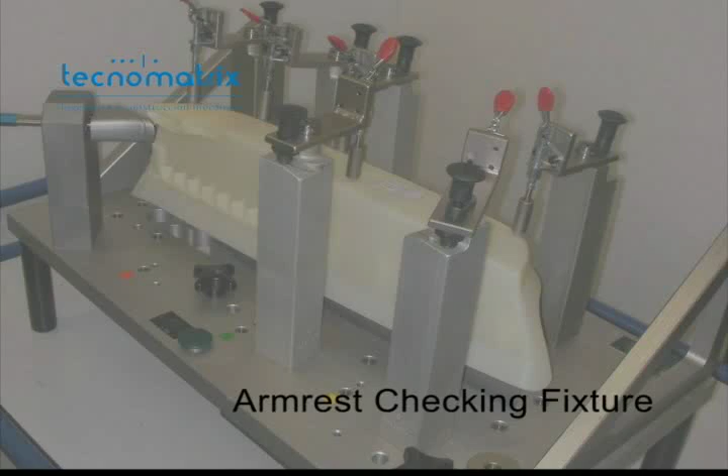Today we'll see together a gauge for an armrest. The main difficulty in this type of part is the number of clips it has. To fasten the part, we have simulated its fixation on the door.

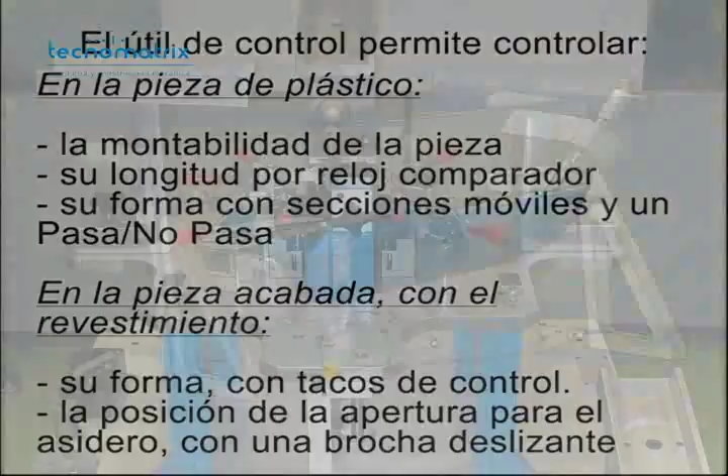This gauge checks the plastic part after the injection process, as well as the finished part covered with foam and the car interior lining. On the plastic part, we check its mountability, length and shape. This is to ensure that this basic part is correct before dressing it with the final interior lining.

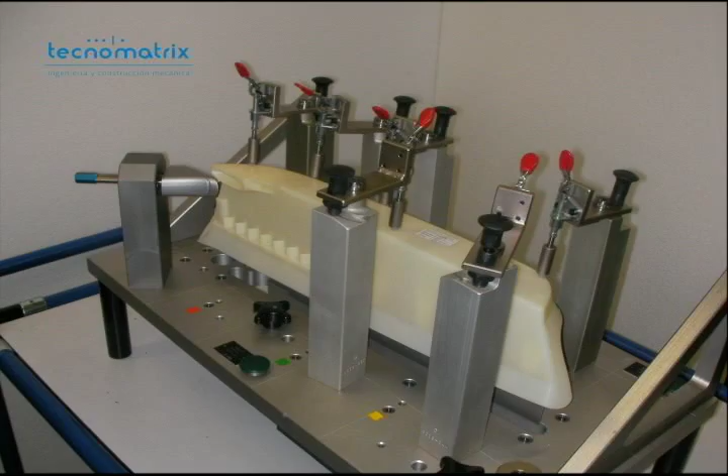On the finished part, we check its shape and simulate the position of the grab handle. This is to make sure that the finished part will fit on the door assembly. Each RPS point enables to fasten one of the clips.

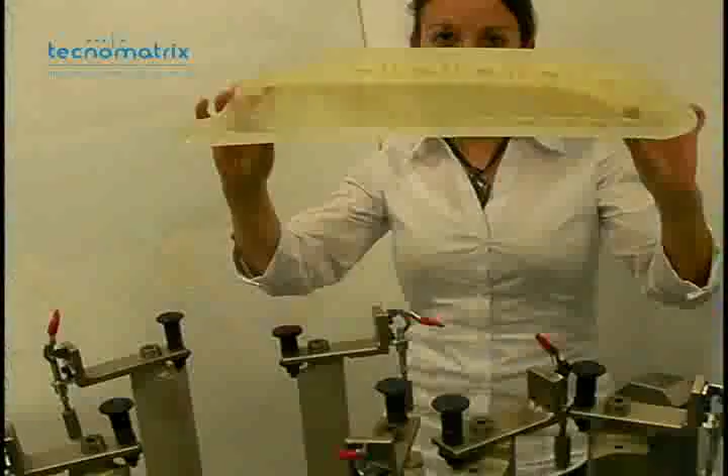To make the mounting of the part easier, we have adapted the clamps on rotating systems so that you can turn back the clamps in a simple and quick way. To mount the part, fasten first the main RPSs. Then, use the squares to turn the gauge back and check that all the clips have entered correctly.

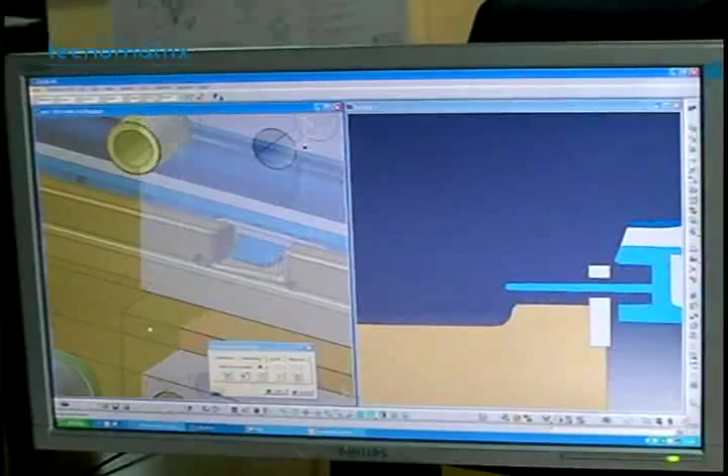Here is a section showing you how the clips of the part are fastened on the gauge. You can see clearly how the part clips on the RPSs.

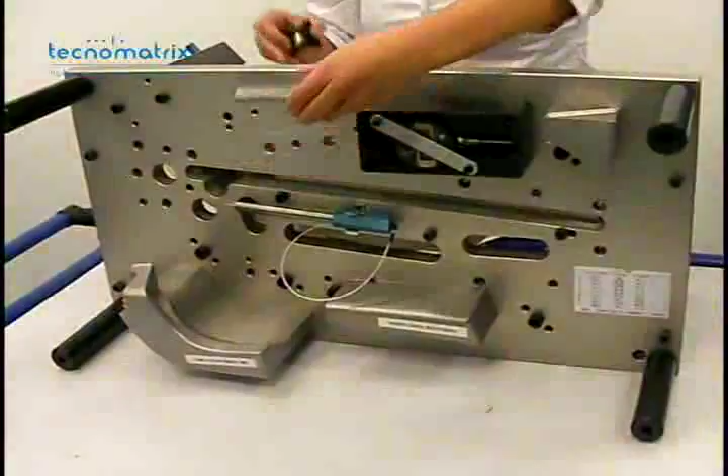The lower side of the base plate is used to store the removable elements of the gauge, such as the checking blocks for the final part, the pin checking the position of the holes of the part, and the dial indicator. As you can see, the blocks are simply screwed on the base plate.

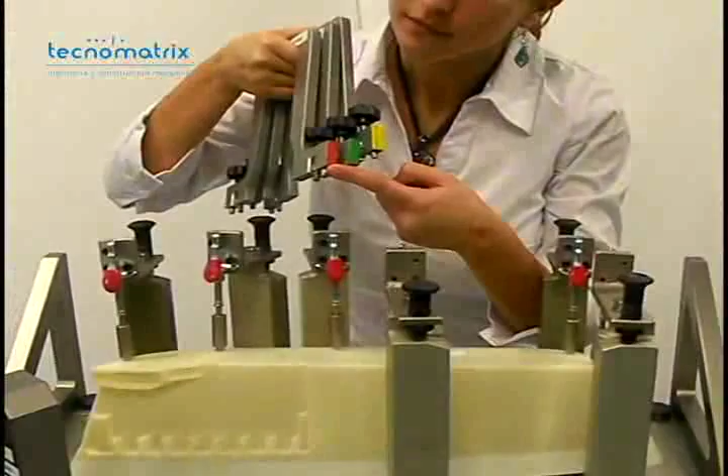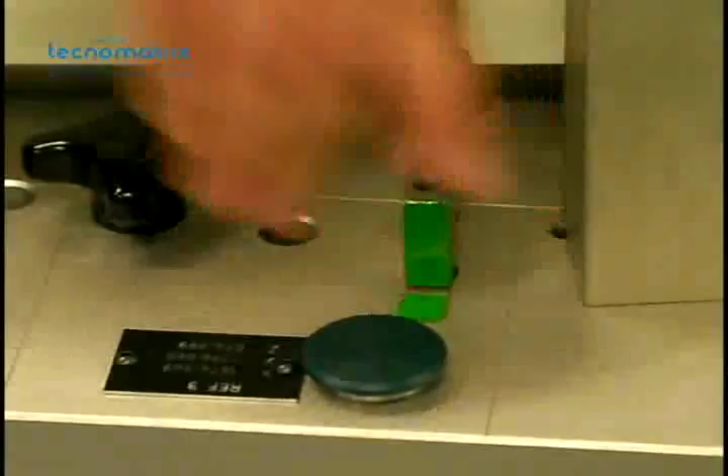Let's go back to the checking of the plastic part. We'll use removable sections to check the shape of the part. In order to identify quickly where each section should be mounted, we have painted the base plate and the sections. Each section can be mounted in only one position to avoid any risk of mistake.

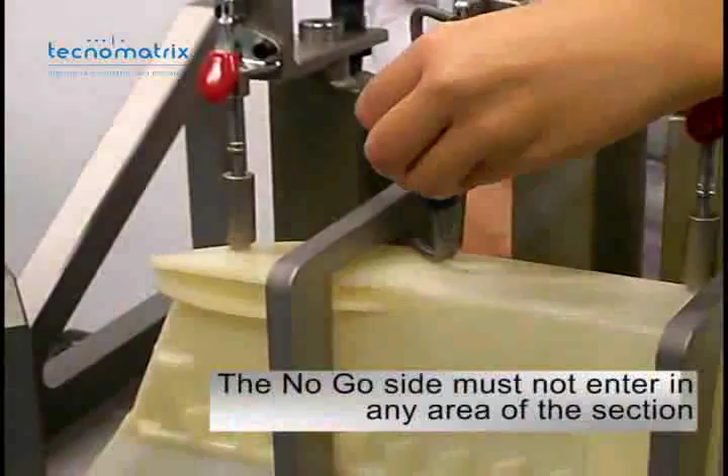There is a constant gap of 5 mm between the part and the sections to check the gap with the go-no-go gauge. Finally, we'll check the length of the plastic part with the dial indicator. The dial indicator bushing is located on one of the removable blocks used to check the shape of the final part, in order to save space.

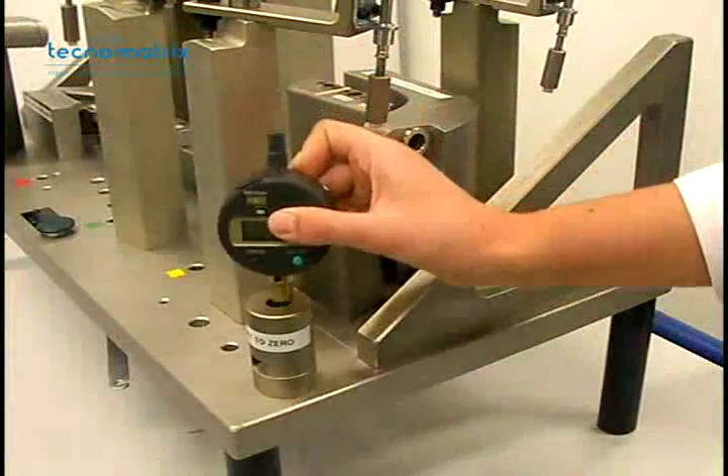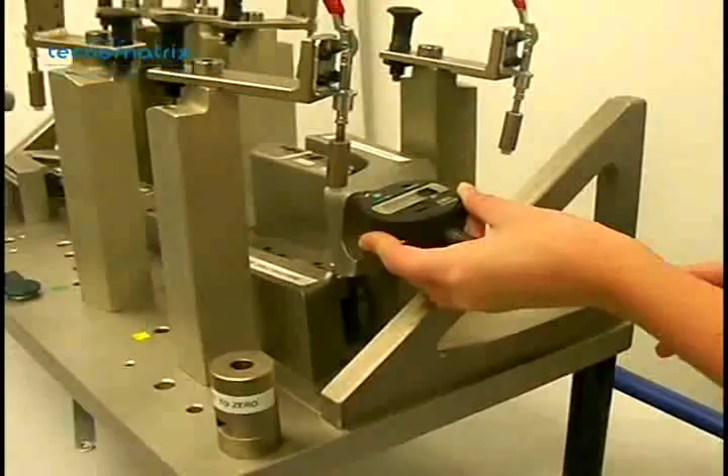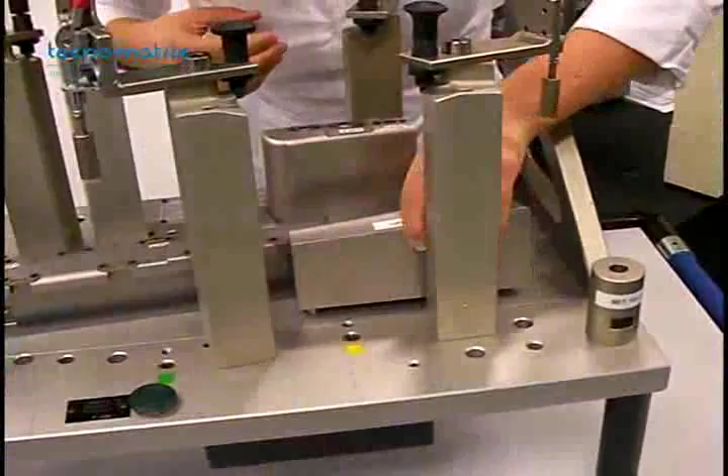Now that we've seen how to check the plastic part, we'll check the final part. If you remember, we'll check the shape of the outline of the part and check if the hole for the grab handle is correctly positioned.